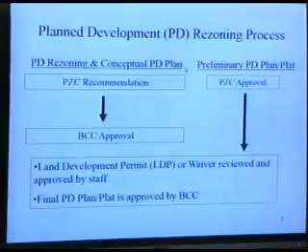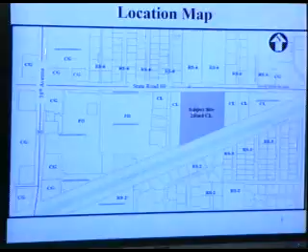The subject site is located on the south side of State Road 60, about mid-block between 43rd Avenue and 58th Avenue, and is immediately between the Sonny's Barbecue to the east and Applebee's to the west. Further to the west is Walmart and ultimately Sam's, and then 58th Avenue.

The comprehensive land use designation for the subject site, as well as all of the properties on the south side of State Road 60 between 43rd Avenue and 58th Avenue, is C/I, commercial/industrial. The residential properties to the north on the north side of State Road 60 are L2, low density residential 2. And the properties to the south across the main relief canal are L1, low density residential-1.

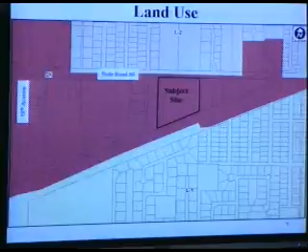The proposed development, the reason for the PD request, is simply to add 2 additional uses to the underlying CL limited commercial zoning district: a tire store and a drive-through restaurant. Sit-down restaurants without drive-throughs are a permitted use, while tire stores are not, they're an administrative permit use. But this PD rezoning request would essentially keep all the uses permitted in the CL limited commercial zoning district and add these 2 uses as permitted uses.

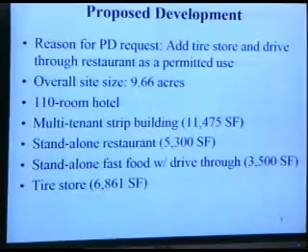The overall site size is 9.66 acres, with a total of 5 buildings proposed: a 110-room hotel, a multi-tenant strip building a little over 11,000 square feet, a standalone restaurant building a little over 5,000 square feet, a standalone fast food restaurant at 3,500 square feet, and a tire store at just under 7,000 square feet. Here is a copy of the conceptual preliminary PD plan.

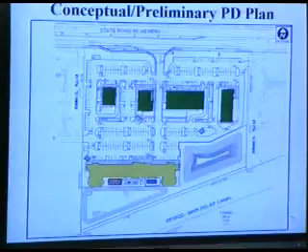Moving west to east is the standalone fast food restaurant with drive-through, the standalone sit-down restaurant with a small covered outdoor seating area, the multi-tenant strip building with a mixture of restaurant, retail, and another drive-through restaurant at the end, most likely a coffee or donut shop. The tire store is the easternmost building, and along the south is the 3-story 110-room hotel with a pool, pool deck, and a basketball/tennis court. Stormwater areas are along the southernmost portion of the property.

Here's an aerial overlay showing how the proposed plan fits into the existing built-out environment along the south side of State Road 60.

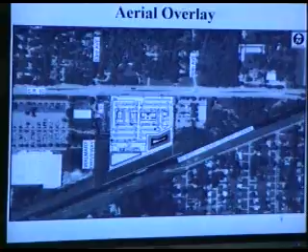The proposed phasing plan, as laid out in the staff report: Phase 1 includes all the common area infrastructure, the driveway connection to State Road 60, the driveway connections to the properties to the east and west, the stormwater, most of the parking in the northeast corner, the tire shop, and the multi-tenant commercial building. Phase 2 is the hotel building with the parking immediately north of it. Phase 3 is the standalone sit-down restaurant and the standalone fast food restaurant.

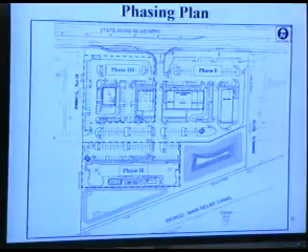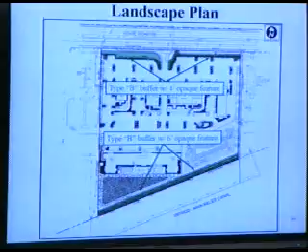The landscape plan and required buffering: the LDRs require a type B buffer with a 6-foot opaque feature along the south property line, because the properties across the canal are zoned RS2 with an L1 land use designation. The properties on the north side require a type B buffer with a 4-foot opaque feature, which is a State Road 60 requirement. There are also internal landscape requirements, including parking area requirements and perimeter buffering between the commercial sites.

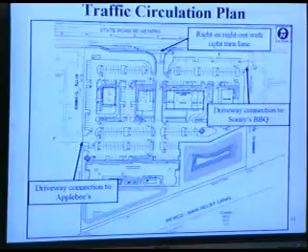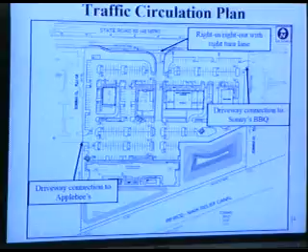The traffic circulation plan shows the proposed driveway connection to State Road 60, which would be a right-in, right-out, accompanied by a right turn lane into the site off of State Road 60. There's also the driveway connection to Sonny's to the east and Applebee's to the west, and ultimately through the Applebee's parking lot to the Walmart driveway, aka 53rd Avenue, which is the signalized intersection with State Road 60.

Outlined in the staff report, one of the recommended items was lengthening the northbound left turn lane on the Walmart driveway, aka 53rd Avenue. The existing left turn lane condition is shown here in blue. The proposed extension would take it to essentially the next driveway cut for Applebee's, equivalent to the east-west driveway connection for Walmart and Applebee's, and all the way through to the proposed site.

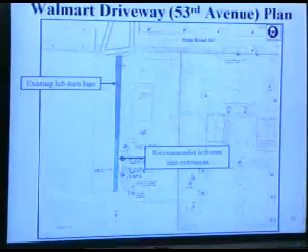The dedications, improvements, and conditions for this project include a westbound left turn lane on State Road 60 at 53rd Avenue. There's an existing left turn lane, but the traffic impact study required extending it. Also, an eastbound left turn lane at an existing median cut on State Road 60, south of the Advance Auto Parts, a little east of the project site, will be extended to facilitate U-turn movements for folks not going out at the signalized intersection.

There's also an eastbound right turn lane on State Road 60 and right-of-way dedication at the project driveway entrance, plus the northbound left turn lane we just discussed. Because the underlying property is actually owned by Walmart, it's not a public right-of-way. The staff report also discusses providing the ability for a 2-year construction bond if Walmart is not quick to respond, or decides it's not an improvement they want to move forward with.

There is an existing sidewalk on State Road 60; however, it will need to be adjusted to accommodate the right turn into the site. Internal sidewalks are shown on the conceptual plan, along with a recorded access easement with Walmart to ensure adequate legal access through the Applebee's property, which is an existing easement, ultimately to the Walmart driveway / 53rd Avenue.

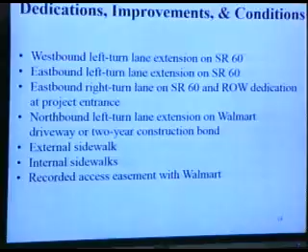Real quick, as I showed before, the stormwater plan proposes the wet stormwater pond along the southeast quarter of the site and a dry stormwater area in the southwest quarter of the site, immediately behind the hotel.

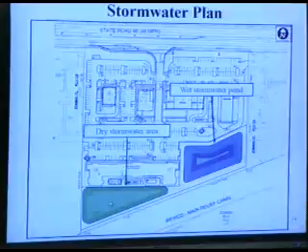Environmental issues: there are no uplands on the site, there are also no wetlands on the site, and there are a good number of trees.

Staff met with the applicants and their consultants and identified a healthy 42-inch live oak that will be preserved in place on site. That will be a real bonus to the site, as well as 7 additional healthy oak trees, laurels, and live oaks that will be relocated to the south landscape buffer, providing a mature buffer as soon as the project comes out of the ground.

Also, about 50 of the 150 total cabbage palms will be relocated throughout the project. Any mitigation required will apply to removal of any remaining protected trees or cabbage palms.

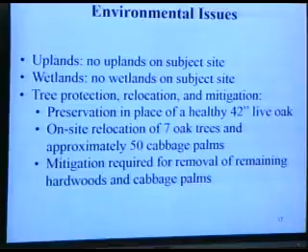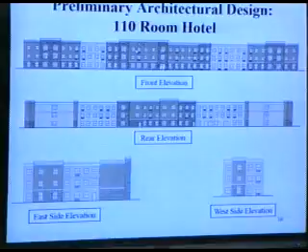I'll run through the elevations real quick, since there's a total of 5. This is the proposed design for the 110-room hotel. It's 3 stories. This is the front, rear, and the 2 sides.

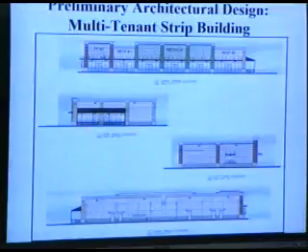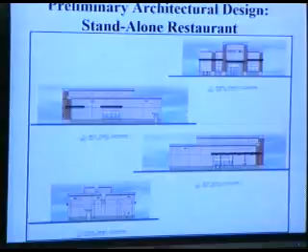The proposed design for the standalone restaurant includes a covered outdoor seating area on one side of the building. There's also the standalone fast food with drive-through, and lastly, the tire store.

Public benefits: for planned developments, public benefits are required to offset either waivers—they're not requesting any waivers in this case—or just the PD rezoning uses that they're adding through the PD process. Those public benefits include the enhanced tree preservation, as discussed earlier.

The applicant has also agreed to extend the westbound left turn lane into the Walmart site, over and above the minimum that the traffic study identified. They're adding about 2 or 3 additional car lengths to be accommodated into that turn lane—a busy turning movement everybody's probably familiar with.

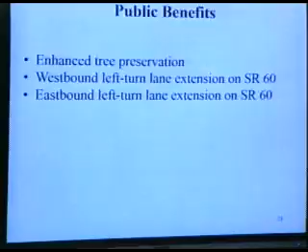With that, staff recommends that the Planning and Zoning Commission approve the preliminary PD plan subject to board approval, and recommend that the BCC approve the PD rezoning and conceptual PD plan for Vero Beach Square with conditions listed in staff's report. Those include final architectural plans, the recorded Walmart easement, final tree mitigation plans, turn lane extensions on State Road 60, the turn lane on State Road 60 at the project entrance, the turn lane extension on the Walmart driveway or bond out option, and installing all required improvements.

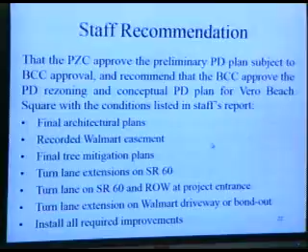I do, but I'd like to withhold until we hear from the applicant. Okay, no questions at this time. I'm going to open up the public hearing. If anybody would like to come forward and speak, please do now.

Good evening, Commissioners. Chris Holland, Kimley-Horn Associates, 445 24th Street, Vero Beach, Florida. I concur with staff—they've been a great help to get us to this point. We've reviewed the staff report, recognize the conditions, and concur with them. We're here to answer any of your questions.

Commissioners, any questions you'd like to ask Mr. Holland? None? Thank you, sir. I appreciate it. Would anybody else like to come forward and speak? I'd like to see the plan again. Please come forward.

I would like to see the plan again, which shows the landscaping that you're going to put up as a buffer. Ma'am, for the record, we need your name and address. Barbara Randolph, 5220 Rosewood Lane, Vero Beach, Florida. Thank you, Mrs. Randolph.

I would just like to see what kind of a buffer is going to be placed there. We listen to Walmart and Sam's beep-beep trucks early in the morning and late at night. I don't think that's going to be the issue, but we would like to make sure that we have the privacy that we now have, and how that's going to be protected.